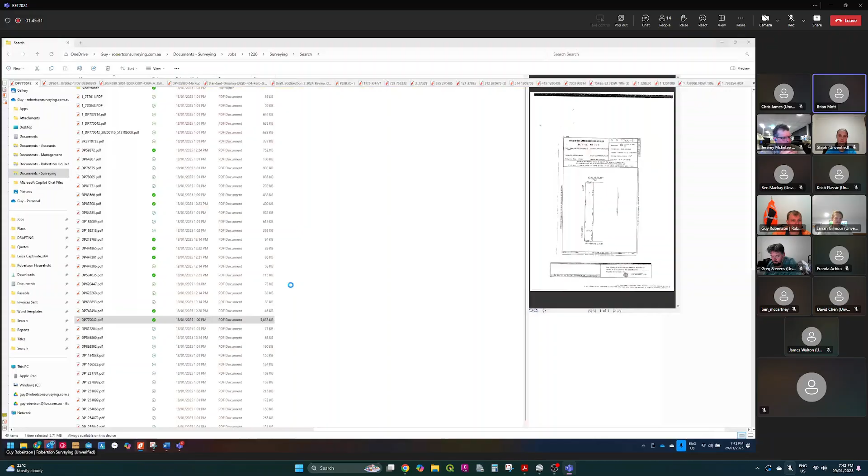But if you have... okay, so to get it in the Torrens system, we need a plan, because anything within the Torrens system needs a title and a plan. Whereas with deeds, you just have that metes and bounds description describing the land. And if you take a quick note in the middle of this particular one, the plan title is basically, okay, this has been drawn up from this particular deed. So you guys doing a city job, or even your rural jobs, and you've got a limited title, make sure you buy that deed and draw it up yourself.

Guy will explain that in a bit. But in that, we have the plan title stemmed from the last deed. Okay, throw this deed out - oh well, beg your pardon, you don't throw the deed out. We'll put that deed within the deeds papers, and we'll now give it a lot and a DP number, get it into the system. Take note within that second block: it says the plan prepared solely to identify the land in the above deed. The boundaries have not been investigated by the Registrar General and is not a current plan. So just take note that it's not a current plan - this particular plan is not current in terms of the Local Government Act.

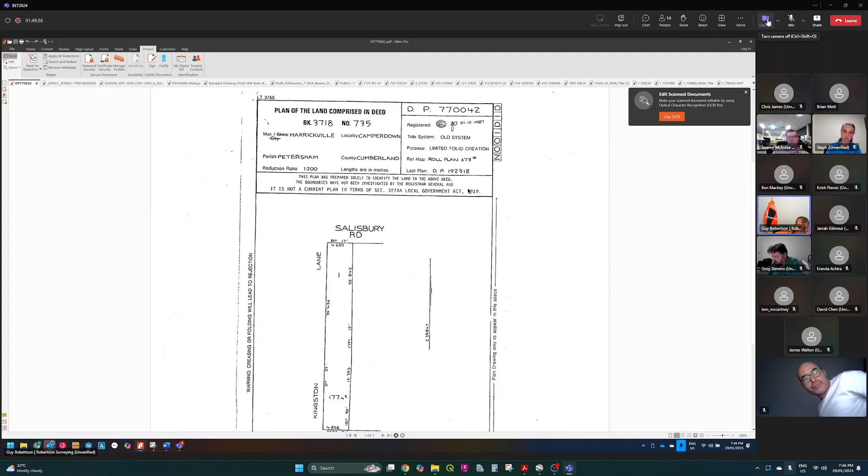So our role would be to prepare that, but then also provide advice, because generally speaking the client is probably going to come to you first. Not always - sometimes they go to the solicitor and then it comes through the solicitor - but I reckon probably 8 or 9 times out of 10 they're going to come through you first. And then you need to be able to advise them on what the process is. Depending on the solicitor, a lot of solicitors are pretty foggy on the whole thing, so you may end up finding that you're giving the solicitor some advice as well. Unofficially, of course, because you're not a lawyer.

Okay, and essentially knowing those steps - yeah, knowing what needs to happen to get a clean title, a clean Torrens title.

Just hold on a minute. We'll get onto that in a minute.

All right, so I guess with limited title, remember that old system title was titled by common law, and to an extent it was titled by occupation as well. So under the Limitation Act of 1969, that sets a period of 12 years where a claim of adverse possession can be made.

So if you've got a fence that is not on the boundary and the deed boundary is past the fence, then whoever's been occupying the other side of it - and I'm not just talking about a fence, I'm talking about any occupation - if they've been occupying that continuously for 12 years or more to the exclusion of others, and it's open and not by force and without consent, then there's the potential for that other person to have to gain title by adverse possession of that piece of land that's over the fence.

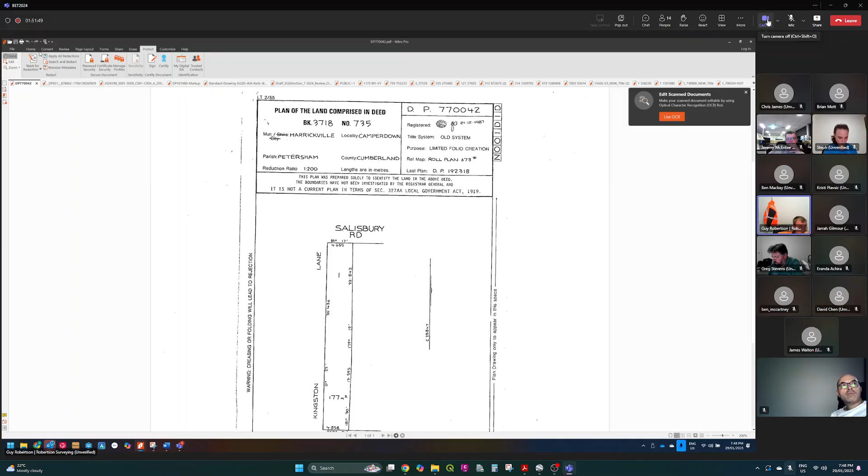So this is where you need to start considering this when you're doing a survey where there's limited title involved. I'm not just talking about where it involves a delimitation, for example, because it can come into play when you're doing something else - it might even be as simple as doing a detail survey.

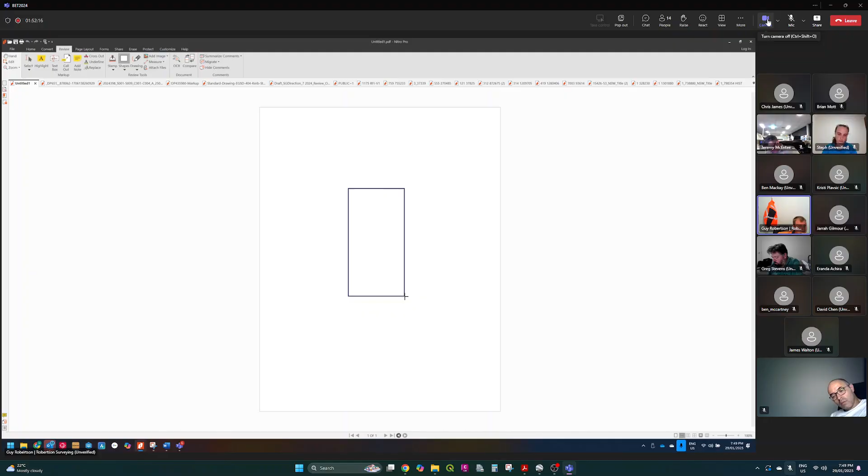So in this example, if you have a block of land and then another block of land next door to it - they're dodgy looking blocks, but anyway, you get the picture - and then you end up having a fence that goes like this.

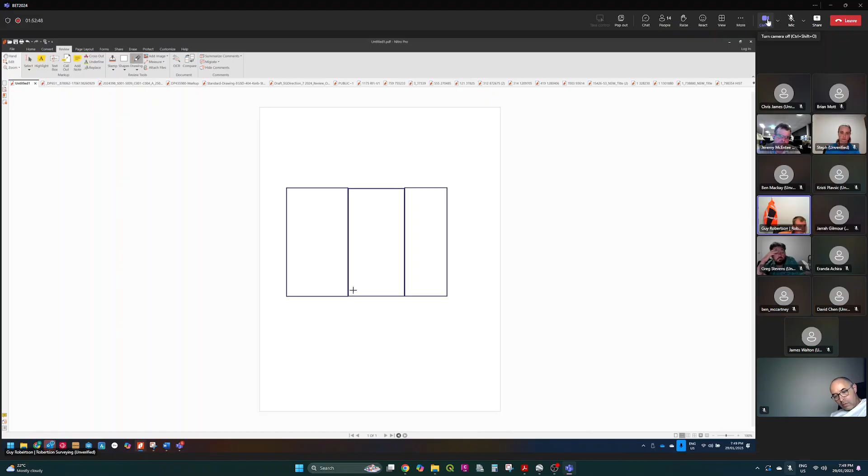Now, if this block here is Torrens title, and this block here is limited title, let's assume that fence is greater than 12 years old. Can anybody tell me what happens with that boundary, what you need to consider, and what the steps are involved to figure out what happens with that boundary?

It would create a sliver lot. No, not necessarily. So what's the process? First up, forgetting about any fence for a minute, in defining the boundary of a limited title block...

Using the deed description, you're going to define the boundaries by title or by deed, same as you would for any Torrens block. But usually with limited title blocks, there's not much in the way of survey, so they can be a bit more challenging, but you're using the same principles to define that documentary title boundary. Basically, it's just exactly the same.

Where it becomes different is when the occupations come into play. You should be looking at occupations in your boundary fix anyway, but we're talking about once the title boundary is settled. Once you've got that definition settled, that's when you start looking at the relationship of the occupations of your land compared to the title boundaries. So in this instance, we're assuming the boundaries are settled for the title boundaries.

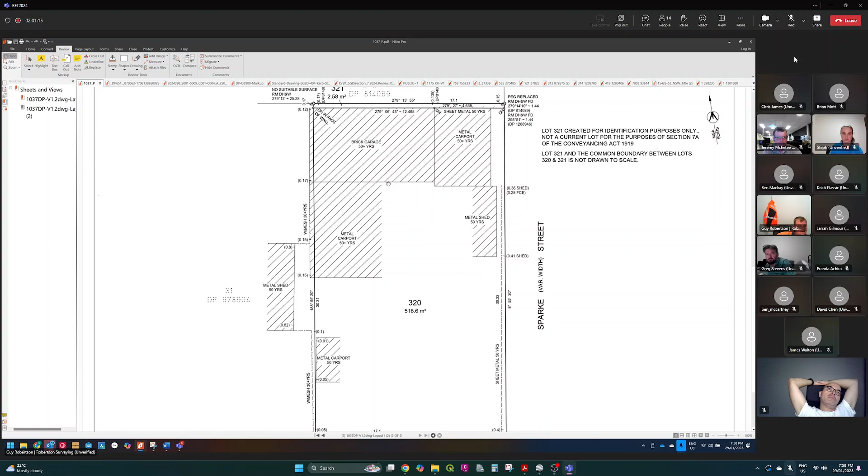And your plan - this is the version that was lodged. It's not the registered version, but the only thing missing is the stamp. So here you can see I've got lot 321 and lot 320, and lot 321 is this sliver here, which is 2.58 square meters.

You put this note on your plan saying lot 321 created for identification purposes only, not a current lot for the purposes of Section 7A of the Conveyancing Act 1919. Lot 321 and the common boundary between lots 320 and 321, is not drawn to scale just because I haven't drawn it to scale, because it's so small. But that note above is the one you need to have on it.

And what they do is the plan gets registered and they don't create a title for it. But what happens is LRS will then write to them, and then they have to engage a surveyor to do a consolidation of their land and the sliver lot if they want to claim it.

That makes sense? So this is, you've done the same process as the bloke that was happy to give his neighbour his deed dimensions, but this guy, lot 292 in this instance, has said, I want that. I do not consent.

So you can see here, I've got 50-year-old occupations along there, and that's what I've had to adopt as the boundary of my sliver lot. And then because you've got to deal with the whole of your title, then, yeah.

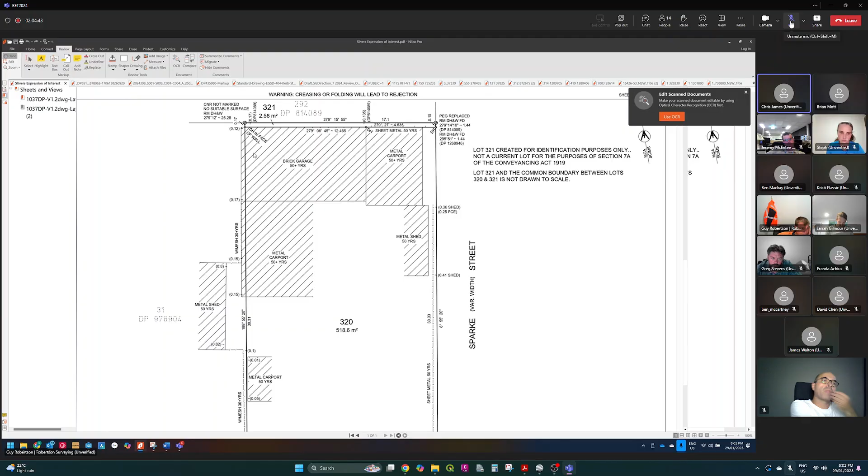So that brings us back, I guess, to the next scenario. Was LRS happy with you keeping those encroachments though, or would they want something else? They did - they sent a requisition notice to me, which advised what they would like, and I'll show you the requisition notice if you're interested.

Just on that one as well, if you weren't occupying more than your deed but occupying less, and you get sign-off by the adjoining neighbour, you don't have to create the sliver lot on the limited title. If the neighbour next door says that's fine and signs a consent, that's fine.

That'd be unusual, wouldn't it, where they sign a consent? Yeah, that's probably more common than not - where they go, whatever, we don't care. Most people don't want to deal with it. So here's a consent, let it open.

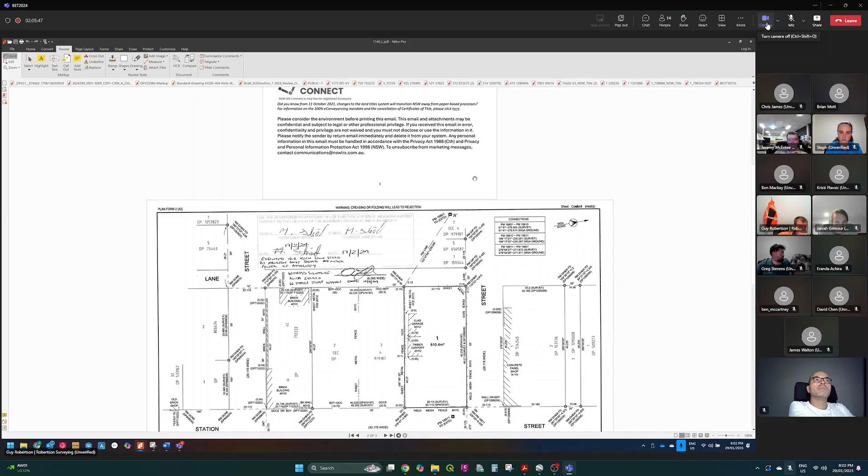But this one was a bit different. There were two owners on title, and one of the guys didn't have capacity. He had dementia or something like that.

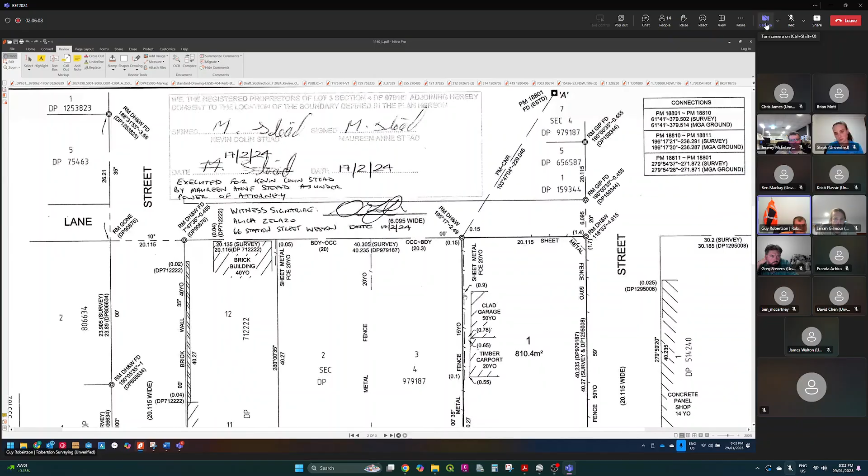I contacted LRS to see what they wanted me to do there. You can see here, it's this bit they're talking about. She signed for both of them, and I got the letter from LRS telling me what they wanted. I put that in and lodged it with the plan.

So, just let me find that requisition notice I was talking about.

I've got one up at the moment in Newcastle in the Hill where the limited title doesn't abut the Torrens lot, so there's a sort of gap in the cadastre.

Right, so would that be a primary application for that? The limited's arguably occupying that lot. Have you identified what the land is?

Not yet, no. Well, that's going to be your first step. Figure out, because it's probably unlikely to be a gap - it's probably going to be a residue of an old title. So you need to identify what that is, because you need to form a common boundary with whatever's next door.

But yes, I see what you're saying. If the fence - if you've been occupying that, and you can meet those thresholds for adverse possession - it'll be a primary application. Unless it's a difference in measurement, and you do have a common boundary with the Torrens land, then you don't need to worry about that. But yeah, you just need to be dead certain about what that land is next door to you.

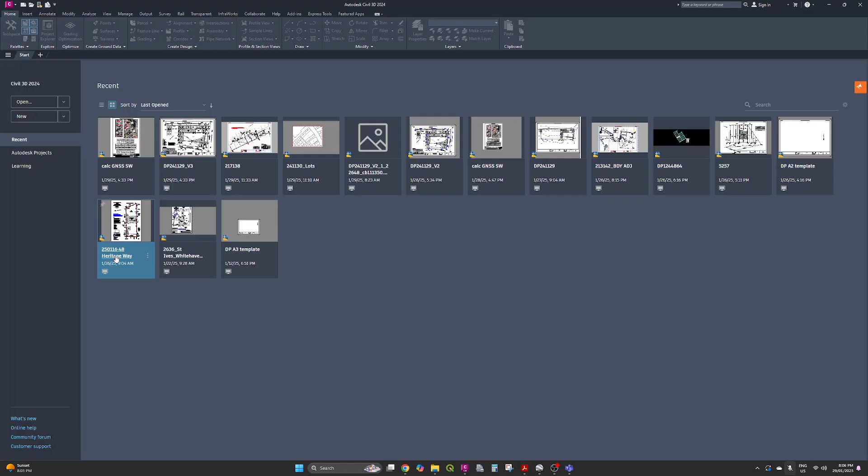Which bit? That's rubbish.

As if I hadn't considered it. Anyway, I actually liked the examiner on this one - I think it was Steve Gerard. He was all right.

Yeah, but it doesn't exclude his client from claiming that via primary application later on down the track. He's still in possession of it, but he's not doing a primary application to claim it now. But down the track, he can still make a claim over that bit of land he's in possession of. And that's where it all comes down to possession.

So I guess the last scenario that we need to show is this: what about this bit here that's on the Torrens title block? You've got limited title next door, you're doing delimitation, and then next door the fence is on the Torrens title block. What do you do there?

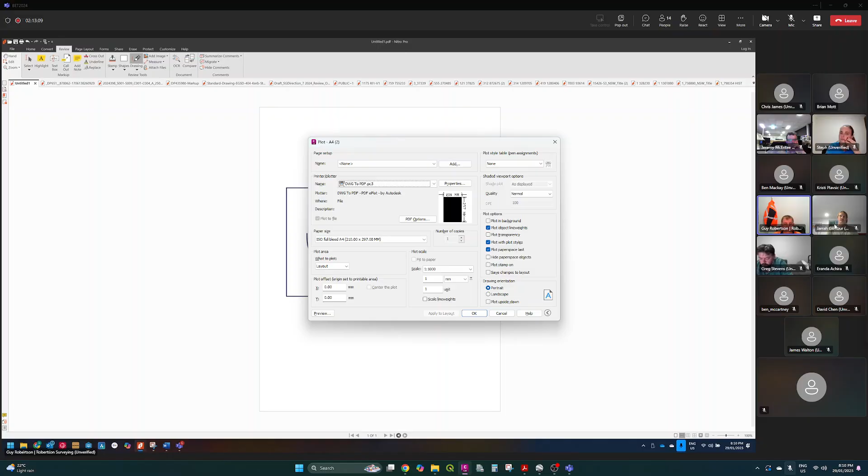Also, recommend a plan of delimitation be completed as well. It's particularly important to think about if your client's planning on building on the site, because the boundaries can change and your setbacks can get stuffed up. I personally won't touch limited title without getting a delimitation done on it.

Because people just don't understand and they end up forging on and it ends in tears. Anything to add on that, Monty? No, I think that's quite adequate. But with all your idents, particularly on limited title land, you need to disclose that scenario. However, I do recommend you do a nice, easy ident. That's your professionalism, to advise your client on such matters.

What about if you're doing an ident or detail survey on the Torrens block, what would you say there? Would you let your client know next door was limited? In this scenario, say you were doing your ident survey on that Torrens block. We don't generally buy adjoining titles. Why not? I don't know. How do you know if it's not Torrens, if there's something going on?